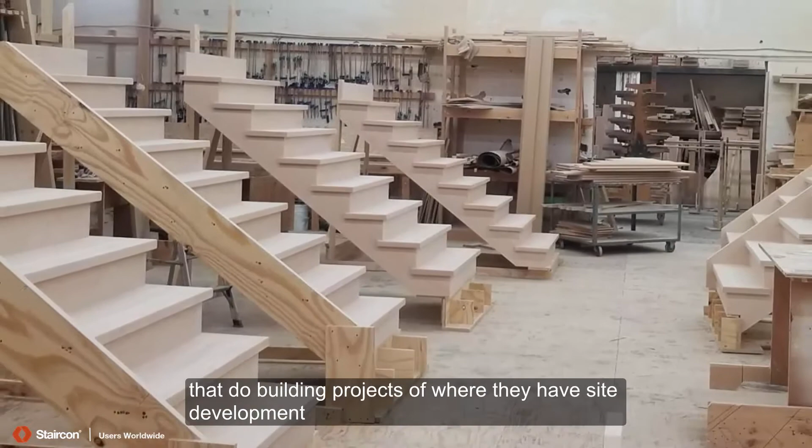Mostly custom homes, and we do have some builder type clientele doing site development of a couple hundred homes, doing 30 to 40 a year of the same models. But the majority of the work is higher end project management type clientele building private individual houses, more custom. So it's a one-off design almost every time.

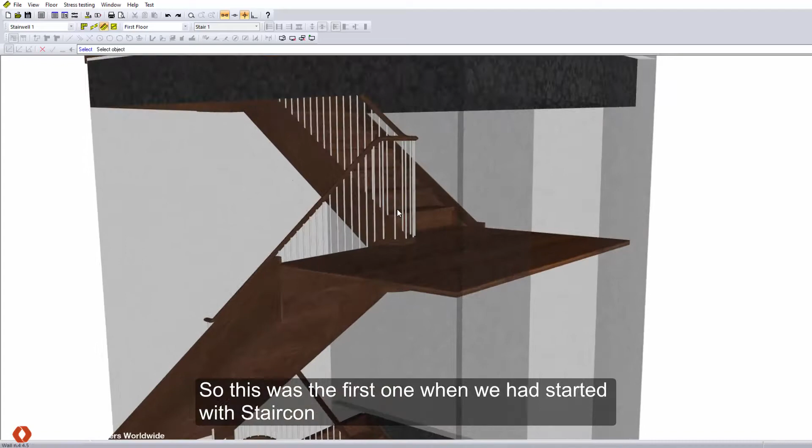Now with switching to StairCon, we find that we are using it more and more on a daily basis. This was first when we had started with StairCon, and the timing couldn't have been better to sign up with StairCon.

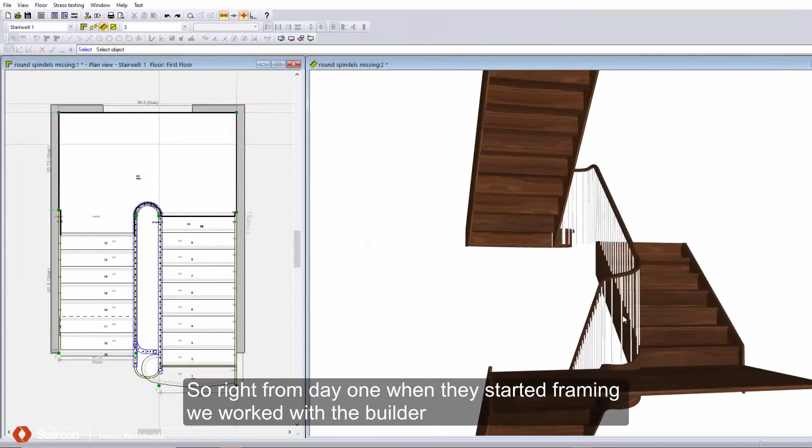The key thing is they wanted the stringer to continue and flow through the landings and the floor levels, so it was all connected, and then the railings in turn to follow on top of the housed stringer. So right from day one when they started framing, we worked with the builder to set up the stair design months before we had even started fabricating the stairs.

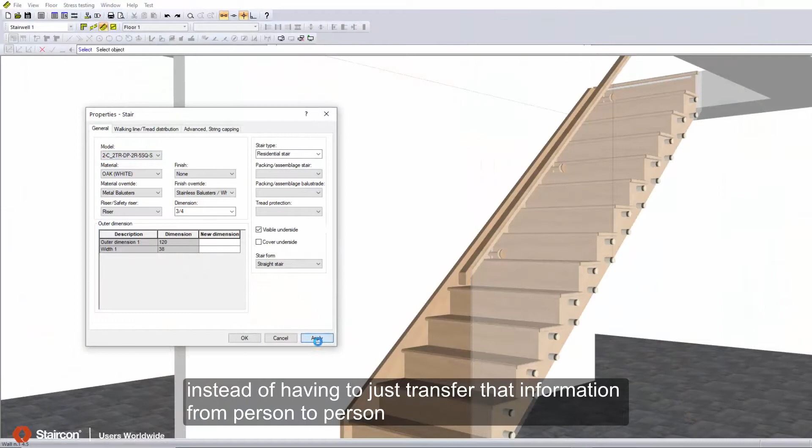Knowledge transfer is of utmost importance, and if we can have it put into a database that somebody can learn to use instead of just transferring that information from person to person, taking the time that it takes, I think it's key to the longevity of our company for sure.

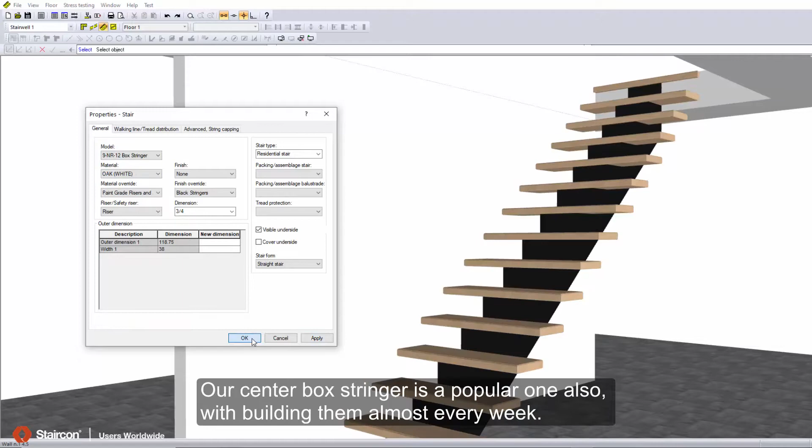A decent buildup of database models, and then just continue building on that. Like our center box stringer is a popular one also, we're building them almost every week. Maybe 50% of the jobs I do, I give them a 3D print screen.

So that helps them get a visual of what they're building, and they get to see the stair in 3D. A picture is worth 1,000 words, right? So most things now are online.

My daughter Alexandra is the lead on the sales end of it, doing online meetings with clients and sending them their images for approval, and then having virtual meetings with them to review.

My name is Alexandra Randall. I'm Brent Randall's daughter, and I do all of the sales, design, and marketing for the company.

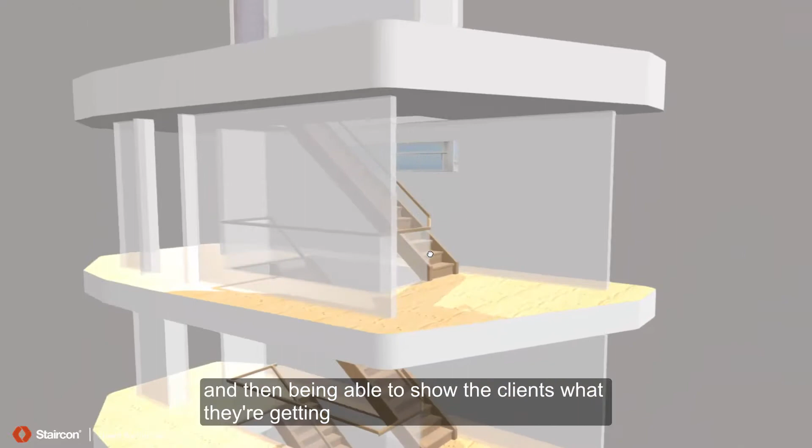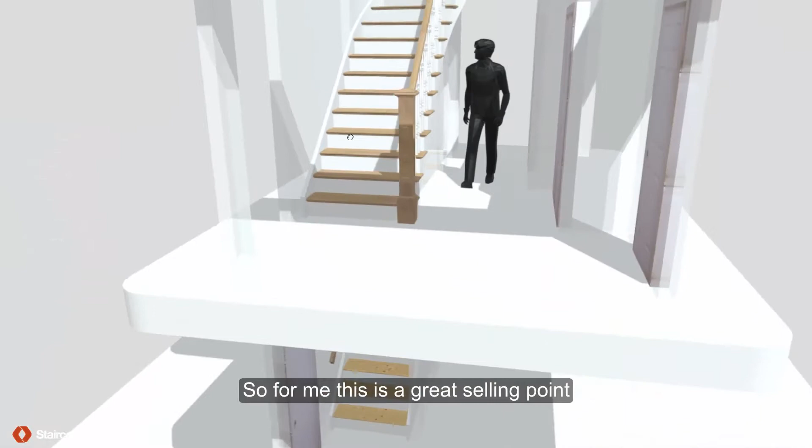For me, being able to create stairs in StairCon and then show the clients what they're getting is great, because a lot of them, when they read a quote, don't really understand or can't visualize the stair. So this is a great selling point because they're able to physically see what they're getting.

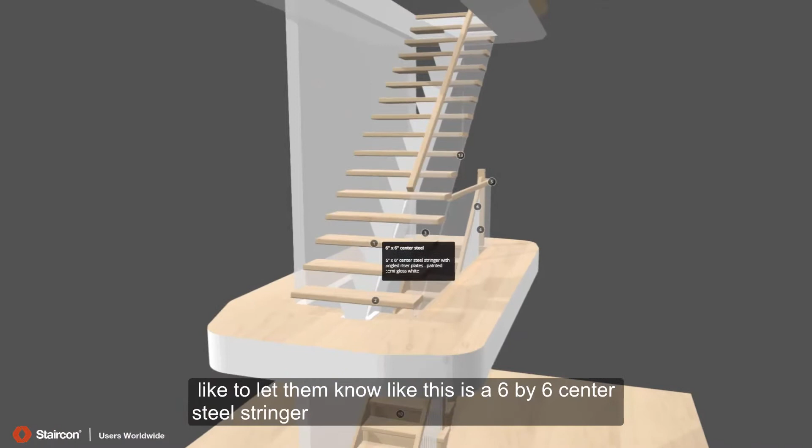Here I'll pretty much describe what it is, to let them know this is a 6x6 center steel stringer, and then I'll describe it a little bit more, that it has the angled riser plates, and we're painting it in white. I'll describe the tread profile.

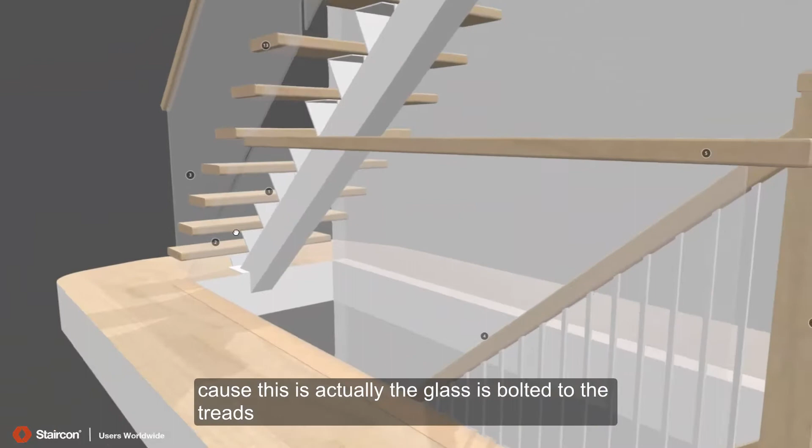Here I went a little bit more to explain the glass, because the glass is actually bolted to the treads, and we have a tread piece on the outside of the glass to cover the bolts. And then here is to explain there's glass, but it's a different application.

This one is actually channeled into the floor.

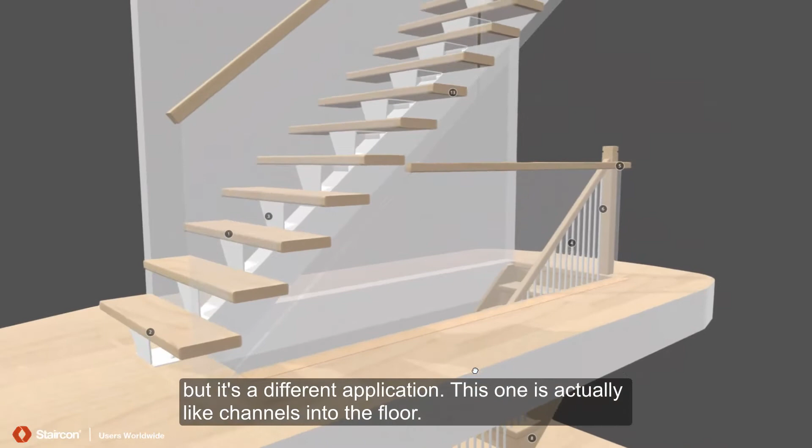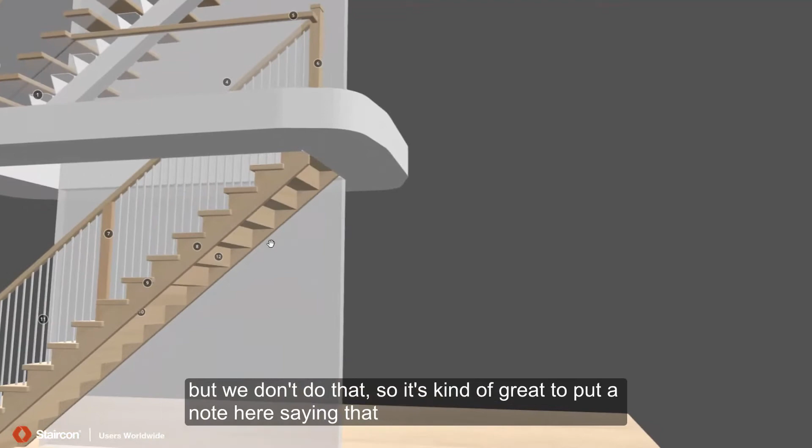Another thing that I really liked was underneath the stair right now is not covered, but usually this is covered with drywall, but we don't do that. So it's great to put a note here saying that the drywall underneath the stairs would be done by someone else.

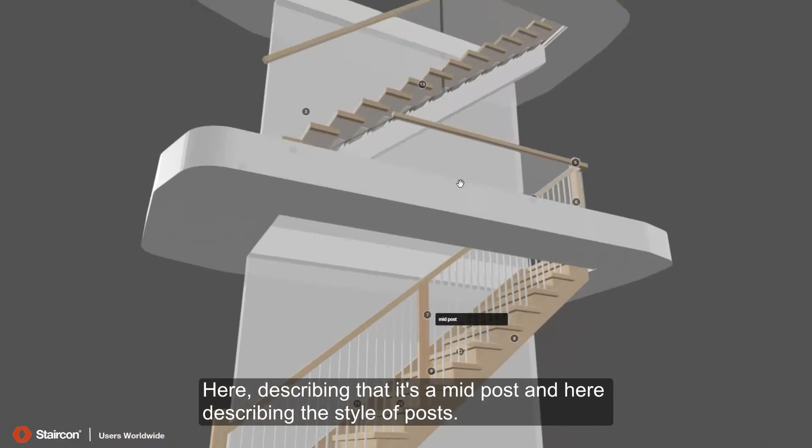And then here I just describe what type of spindle that is. Here describing that it's a mid-post, and here describing the style of post. So just describing it a little bit more when I'm sending off the link.

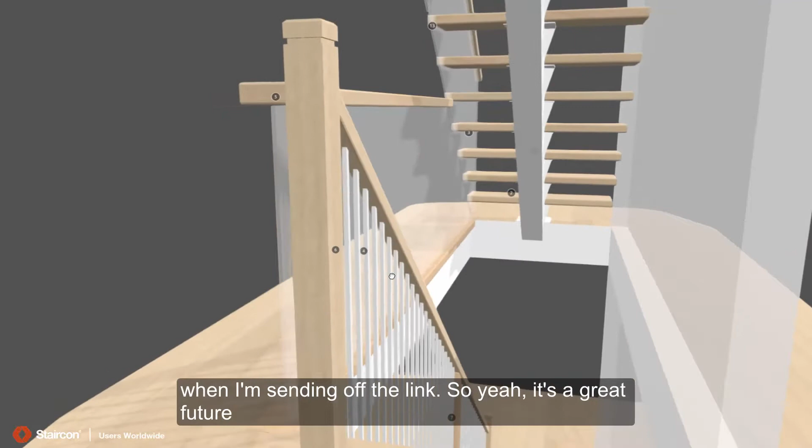So yeah, it's a great feature because a lot of people don't understand stair terminology like we do. I deal with a lot of private homeowners, builders and contractors that do renovations in houses.

I use StairCon to recreate as close as possible the stair that we have provided an estimate for. And then usually right now I'll have a virtual meeting with the client and actually have StairCon running with them, looking at their stairs and designing with them on the go.

Different posts or different style of spindles, trying to get it as close to what they want. When you're looking at pictures, the client will go from one style to the next, right? Like they'll say, oh, I like option 1, but I also like option 3, and I like option 4.

And they want quotes on all these options, which is a lot of time and effort on our part to quote and then possibly not get the job. So I find if I do it in StairCon, it helps a little bit. It's quicker because then it's just a click and okay, you want spindles, this is the best way we do it.

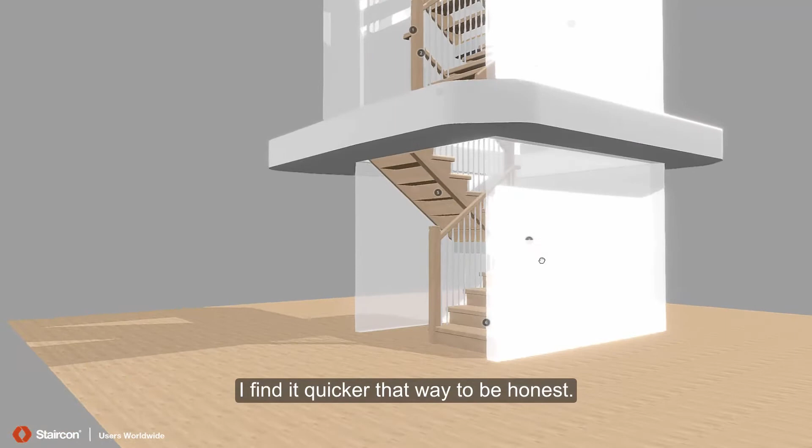And then we just change a few things—I find it quicker that way, to be honest. This is a typical stair that we do quite often, but the client had a few options, like a close stringer on this side.

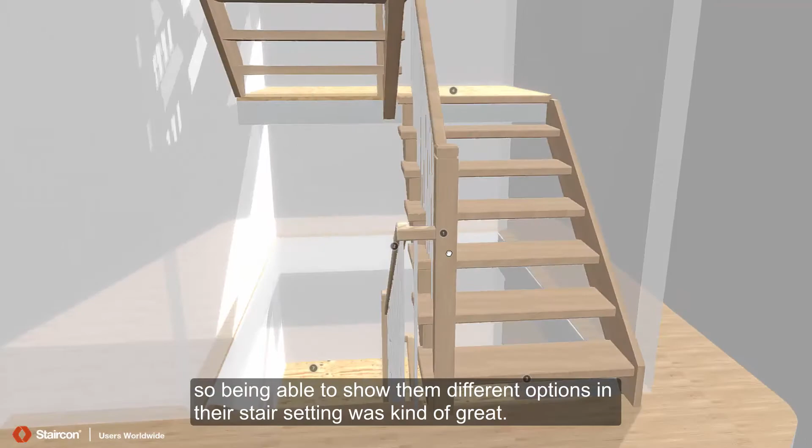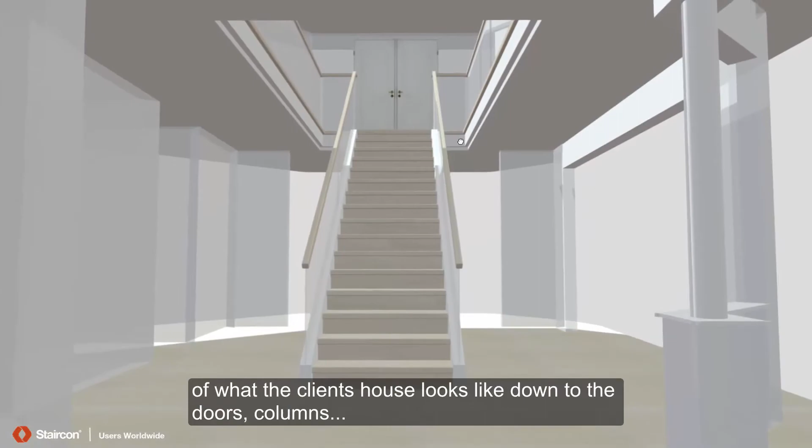This one's actually pretty cool. This is Brent's creation—he figured out how to do columns in the house with walls and doors, so this is almost an exact representation of what the client's house looks like, down to the doors, columns, and the doors upstairs for the hallway. It's exactly like the client's house.

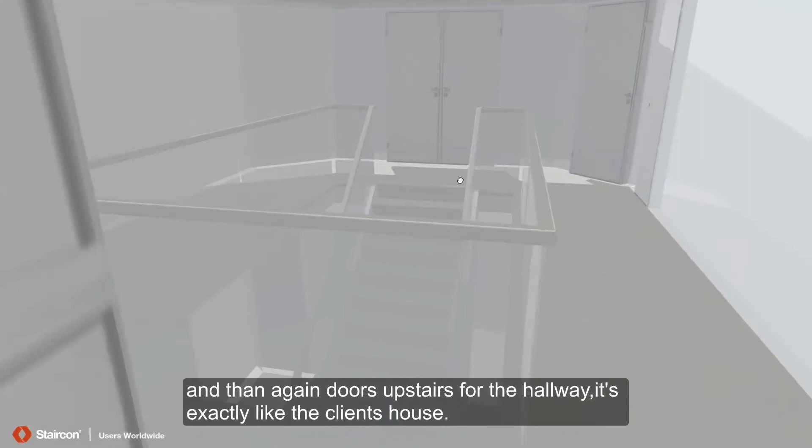So I find myself, when measuring, I measure the hallways and all the walls and draw them in so they can say, okay, if I'm in my living room or dining room and I look across, this is what I'm going to see. That one's installed now—we're just waiting for the glass.

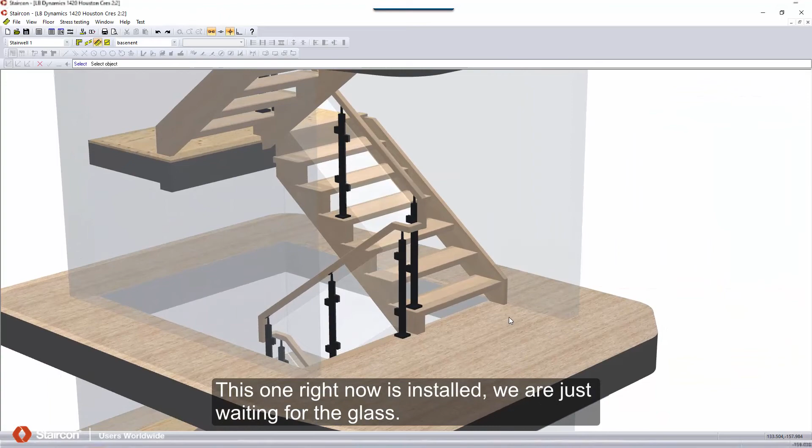This definitely helps with post placement and railing offsets. When I have posts and glass like this, the StairCon drawing really assists me. If the project is drawn in StairCon, it's more precise than my old way of doing it—figuring a certain number of risers, adding extra length, extra spindles. Now I find myself checking my drawings and measuring exactly the length I need, so I do see savings in materials and eliminating waste.

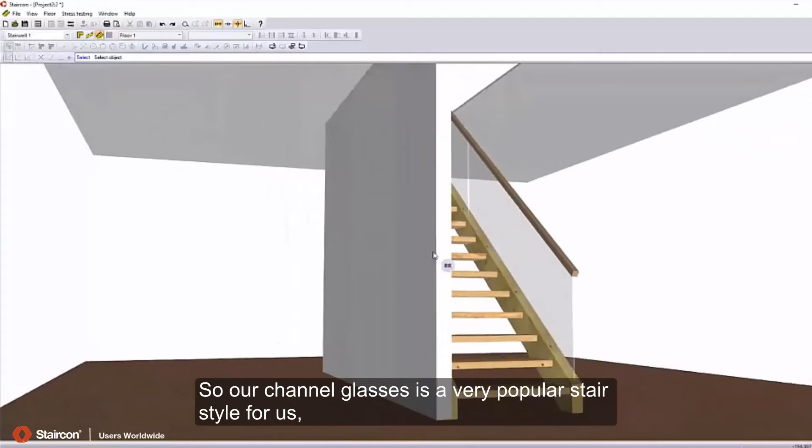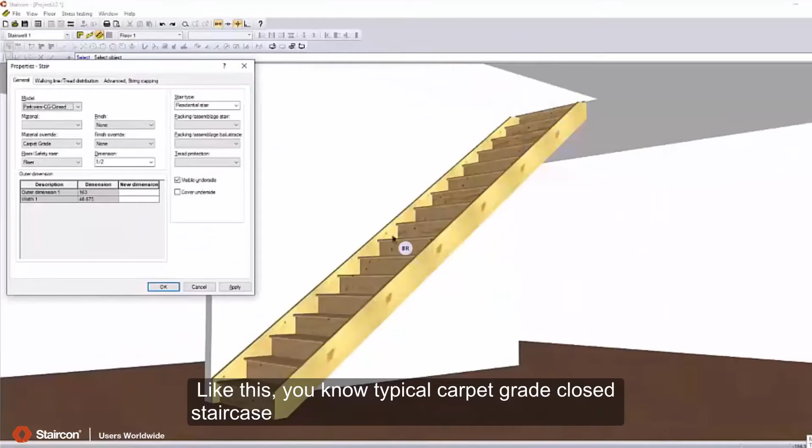Our channel glass is a very popular stair style for us, so being able to quickly show clients, and even for shop work orders, I've done a couple like this. Having the ability to quickly draw it and show clientele is amazing. This typical carpet grade closed staircase—we have one builder who builds a lot of these—is one of the first ones we're putting into shop work orders and production, so it's a simpler one.

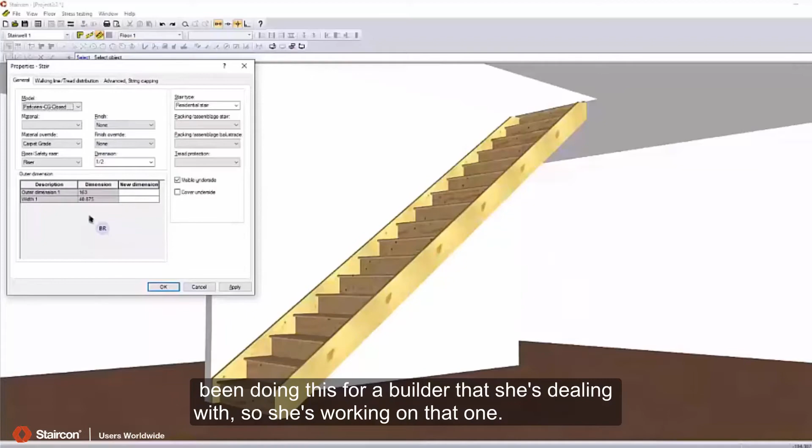Natalie's been doing this for a builder she's dealing with, so she's working on that one. My name is Natalie Randall, and I take care of the builders for our company—the ones that have 100 plus homes a year.

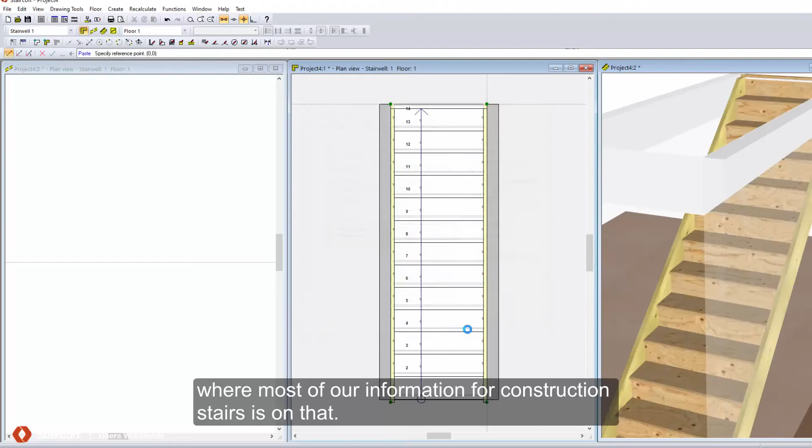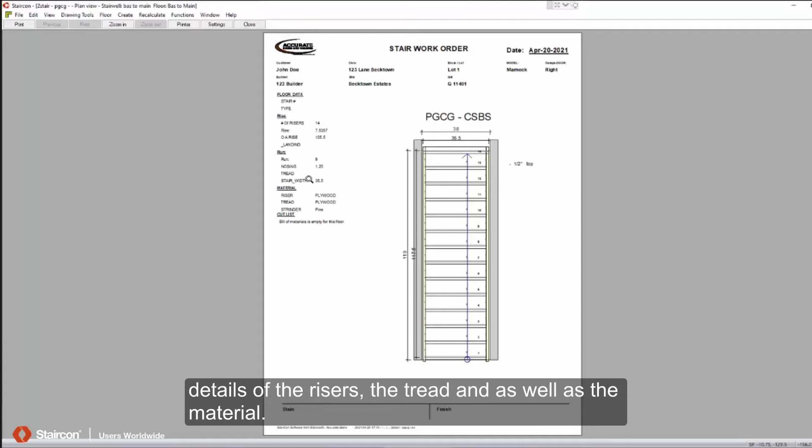Now with StairCon, we're able to output printouts where most of our information for construction of stairs is on that, and then we bring them to production. Stairs get built and go out for delivery with the same work order we print from StairCon. This gets printed for our guys in the back for producing, giving them the details of the risers, the tread, and the material—since most of them are carpet grade, this is our basic code: paint grade, carpet grade stairs, closed both sides, meaning between walls.

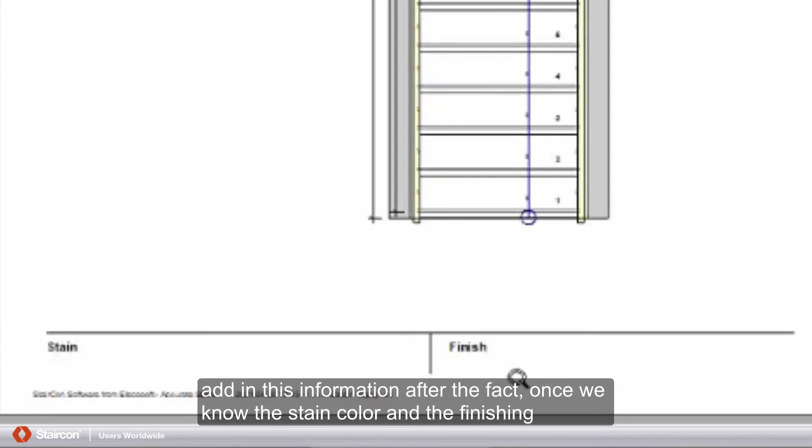When it's a hardwood staircase, we're able to add in this information after the fact once we know the stain color and finishing. It's also set up for client signature—we want them to confirm these are the proper dimensions and then sign off.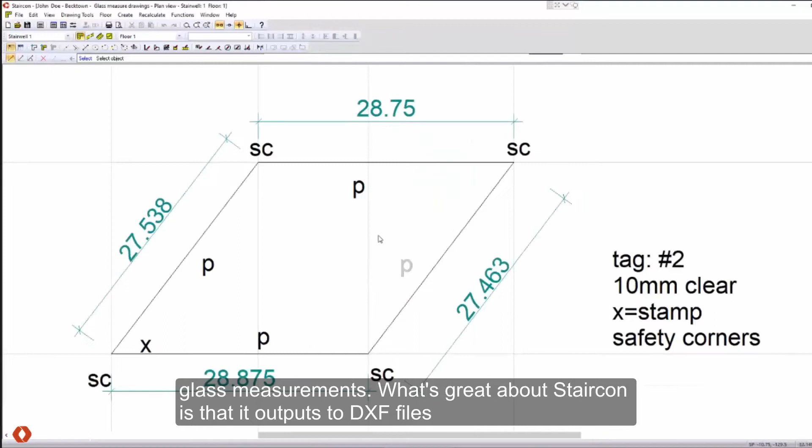There's one more document we've set up for glass measurements. What's great about Staircon is that it outputs DXF files we can email to our glass vendor, and they produce the glass. Usually I'll print this out for our guys for the installs, and then I'll create the DXF file to send off to our glass vendors to have the glass produced.

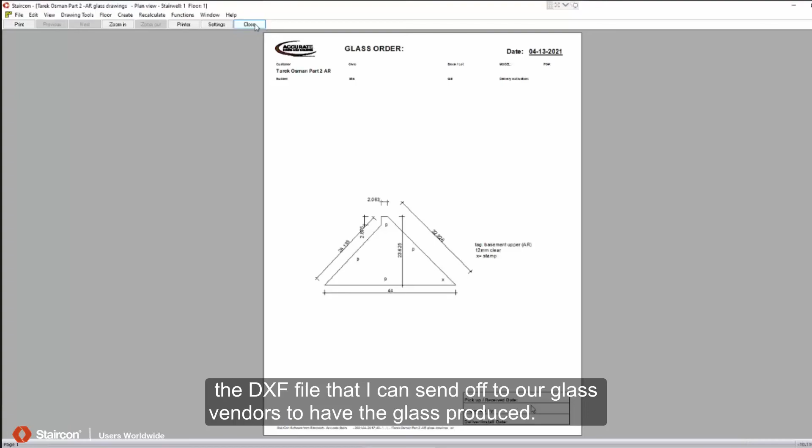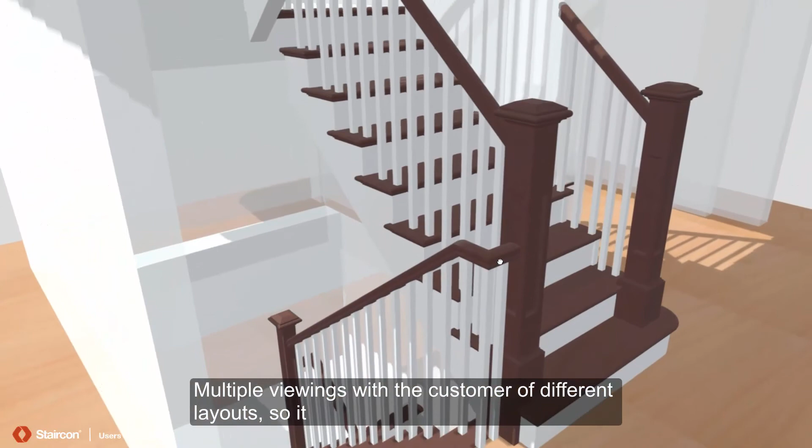This is one we just installed today. Multiple viewings with the customer of different layouts definitely helped them make their final decisions, because it incorporates different shaping of the first tread, different shapes, and position of posts and such. I find it's great.

On the sales end, it's awesome because more and more people want to see things—they're very visual. Usually the client comes here and looks at products and sees stuff, so you kind of follow what the client wants. With virtual meetings, they're expecting you to do a presentation, because they're not physically here looking at stuff, so they're waiting on you to show them in that direction.

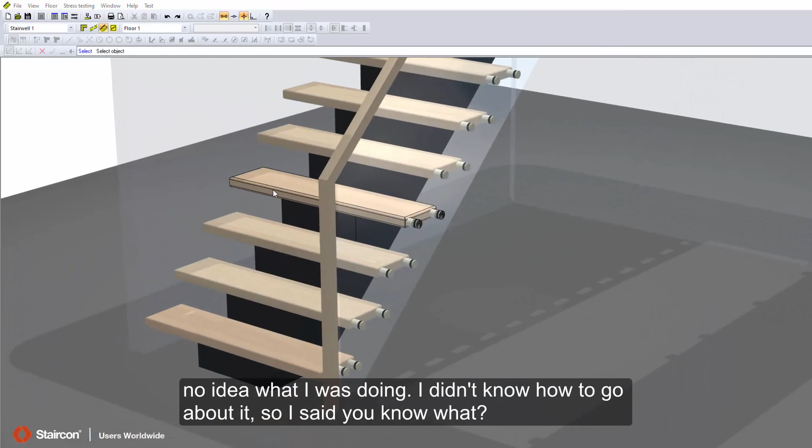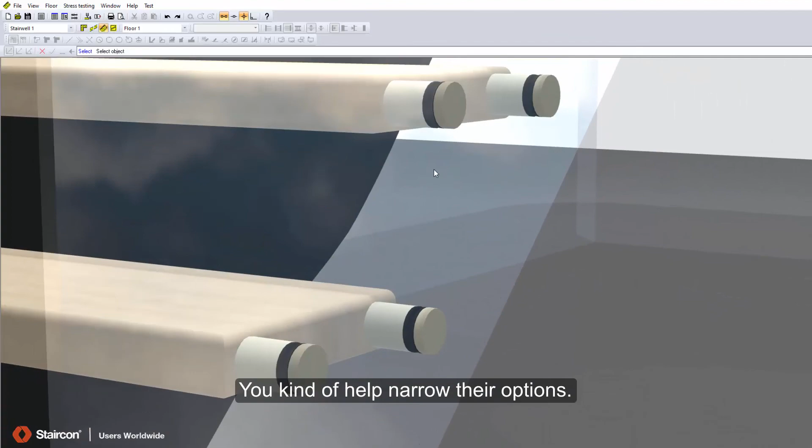I found that using Staircon helped—the first virtual meeting I had, I had no idea what I was doing. So I said, you know what, I'll just pull up Staircon. I looked at their pictures, since they send pictures beforehand, so it's easier to stream their design and ideas. You kind of help narrow their options, play around with it, and I find it's interactive and helpful. For virtual, it's great.